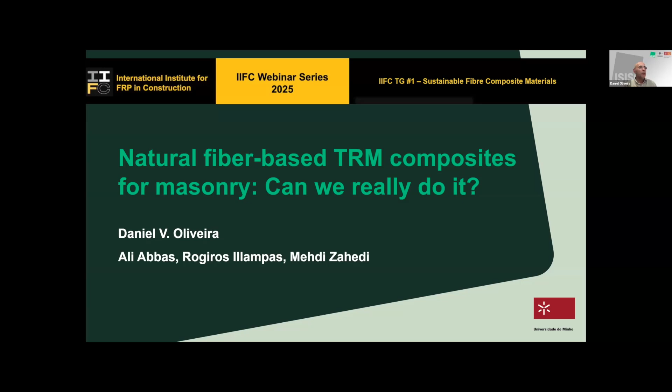So I will start with a brief introduction, presenting the scope, the problems, and the way we think we can work to come up with solutions. Then the second part will be presented by Dr. Ali Abbas, the person who implemented our ideas and performed the validation of the solution itself. He will provide all the details regarding the development of the solution.

So I will start briefly, just to give you an overview of our way of seeing the problem and coming up with it. I think this is very clear and quite agreed that our built heritage suffers from different problems, and these structures are always at risk. When I say structures, I mainly mean buildings. Although in my pictures I have other types of structures, we are typically talking about residential buildings, but this can easily be extended to other types of structures.

This should be very clear: there are two main sources. The long-term degradation that is sometimes difficult to understand or see because it takes years, dozens of years, to develop. But we also have to take into account that climate change will somehow speed up this process. This is something we cannot neglect.

On the other side, we have the extreme events. This can capture our attention very well, especially earthquakes, especially if you are located in the south part of Europe like we are, where earthquakes and masonry constructions are both very common. So one or the other will cause problems to our structures.

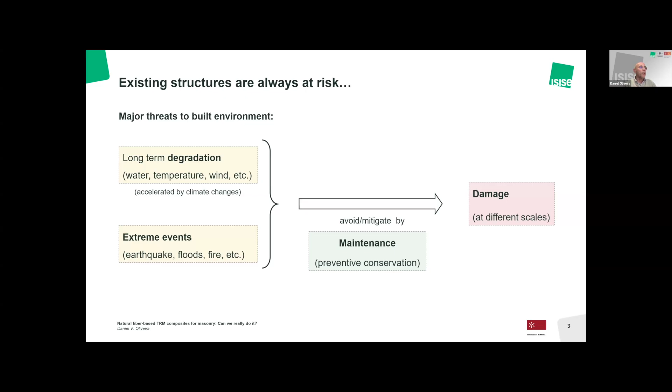They will cause damage, and we have to mitigate this damage. We cannot forget - I'll just open a parenthesis to talk about preventive conservation. This is really important; we can minimize a lot of problems that appear downstream if we act to prevent problems from appearing. Anyway, the focus here will be extreme events.

In particular, the extreme events we are talking about are earthquakes. As I was saying, in Portugal, Spain, but I would say all the Mediterranean basin, we have problems regarding earthquakes. And if you put together earthquakes and existing traditional masonry structures, you may have huge problems.

We have two very clear types of collapse. We have the out-of-plane failures, which are triggered by very low levels of horizontal acceleration. In addition, you have the in-plane failures, which affect the structure in a more global way.

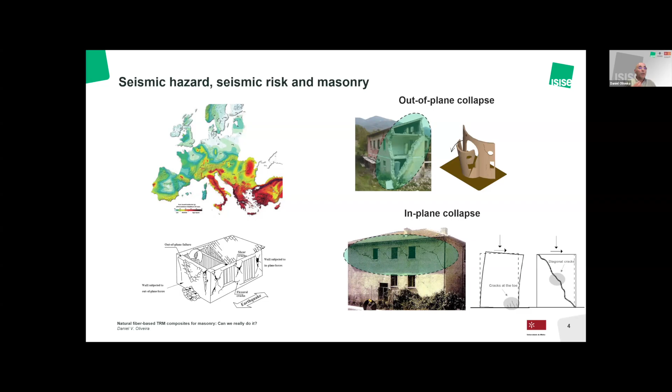Both are important, and most codes and most of us pay attention to the in-plane failure modes, and sometimes we tend to neglect or forget the out-of-plane ones, which are critical because they appear at low levels of acceleration, and once they appear, you can no longer count on the structure for the in-plane modes.

So we have to act. I will briefly show the traditional intervention techniques that work quite well from a technical point of view: tying pieces together, connecting adjacent elements - walls to walls, walls to floors, all these things. And when the structural element itself has problems, you can also strengthen the element alone by grout injection.

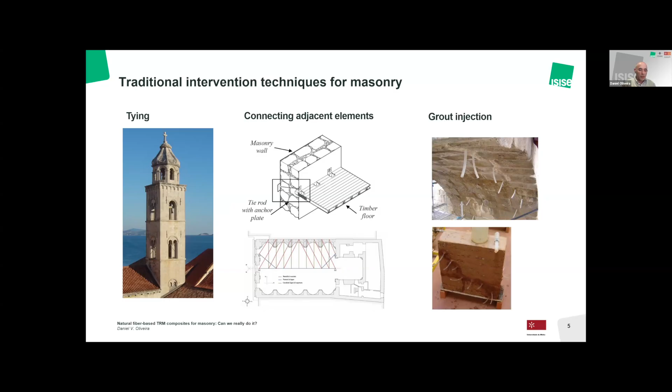These are traditional techniques, but we also have quite innovative techniques approaching the topic of this seminar. We have been using more in the past FRP-based solutions for masonry, and in recent years we have changed from an organic matrix to an inorganic one, typically using lime-based mortars.

This gives us the so-called FRCM or TRM solution, where you use a synthetic mesh embedded in a lime-based matrix, or more recently the so-called CRM, composite reinforced mortar, where instead of a dry mesh, you have a mesh impregnated with resin, which is then placed inside a lime-based mortar. These techniques are quite popular nowadays for seismic structural retrofitting, and they are quite different from each other.

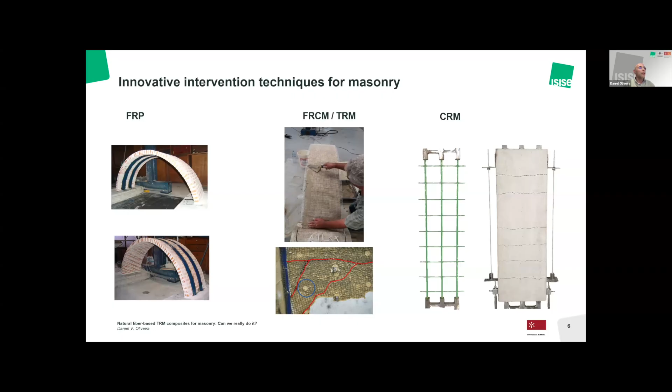I will not discuss here why we use one or the other. It's clear that there's a very important trend moving from organic matrices, resin-based ones, to lime-based mortar ones, mainly due to the compatibility of the solution regarding the substrate. Anyway, this is well known, I will not discuss this.

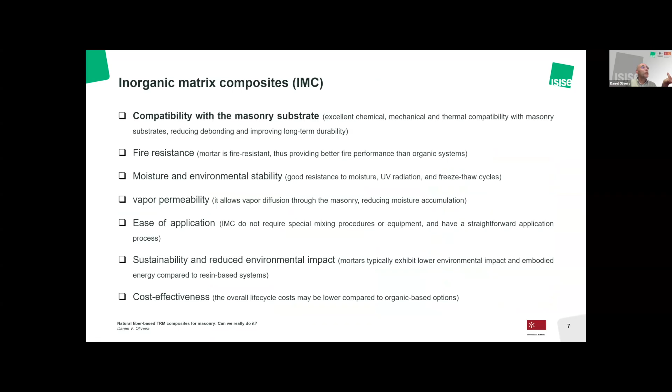But the point here is, how can we use inorganic matrix composites in a more sustainable way? One possibility is to play with the mortar. The other one will be to think about different meshes. And this work is this discussion.

Natural fibers are a good candidate. They present a lot of advantage regarding the synthetic products in terms of cost, in terms of energy of production, in terms of renewability or not. So also regarding mechanical compatibility and mechanical performance. Some of the synthetic fibers, I would say, in some cases are too good for masonry, because masonry is a weak substrate, and we cannot exploit the full potential of the synthetic fibers.

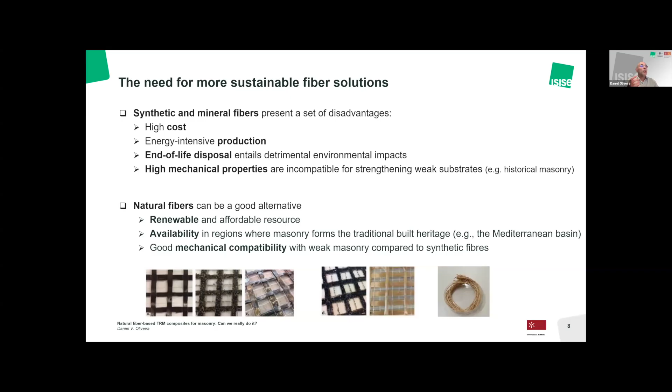So in this sense, it would be logical to use a type of fiber that is less performant from the structural point of view, but still suitable, and that would make sense to be used to produce a clear seismic improvement, typically in terms of displacement, but also in terms of mechanical capacity. And this was the idea that we started discussing: does it make sense to do this substitution, to think in this way?

Well, it's not clear. There are still doubts nowadays, although this started probably more than one decade ago, on the best way to proceed. And I think this type of group is very useful for us to discuss this, to compare approaches, and to come up with ideas and work groups to move forward in using this type of material.

As you know, this is a natural material, and as all natural materials, you have some uncertainties regarding the mechanical performance, and this is an issue because we have codes that somehow guide us and tell us the minimum capacities of the material. So in this sense, natural fibers can be an added challenge, still doable. So we can in fact work with this.

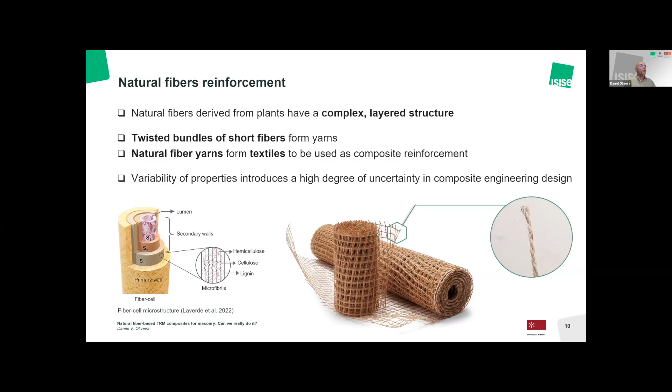I will not go into the production systems, but basically, if you look at the fibers - and I'm being focused on plant-based ones, mainly not animal-based, but talking for instance about hemp or flax or sisal - we have short fibers, and if you put these short fibers together and twist them, you go for long yarns, and then if you play with the yarns, you can create the meshes that you see in the pictures. It looks fantastic, but these fibers or yarns present some issues.

First of all, they depend a lot on several parameters. It depends on the type of plant, on the harvest process, on the country you are raising these plants, on the architecture, the way you produce the fiber. So it depends on several things, including whether you do some previous treatment to the fibers or not. I will not discuss this here, but we have to be aware that this is quite important.

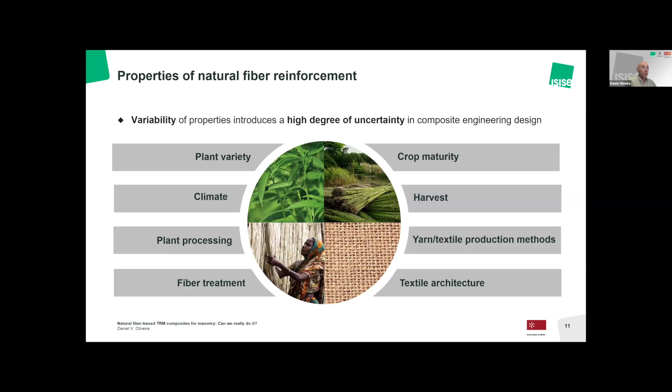So you may have even two fibers or two yarns coming from the same species, and you may have important differences in terms of mechanical performance.

This is just a brief comparison: once you start talking about natural fibers, you have to compare them with the synthetic ones. You have a comparison here with PBO, carbon, steel, basalt, and glass. On the horizontal axis, you have the relation of the elastic modulus between the fibers and the mortar, so the inorganic matrix, and on the vertical axis you have the elastic modulus of the fibers.

And you see that natural fibers are located on this bottom left side. It's clear that their mechanical performance compared to carbon, for instance, or steel, but even glass, is definitely on the bottom part. But as I said before, for some structures that possess low mechanical properties, natural fibers could be a good, affordable and suitable option to substitute the synthetic fibers.

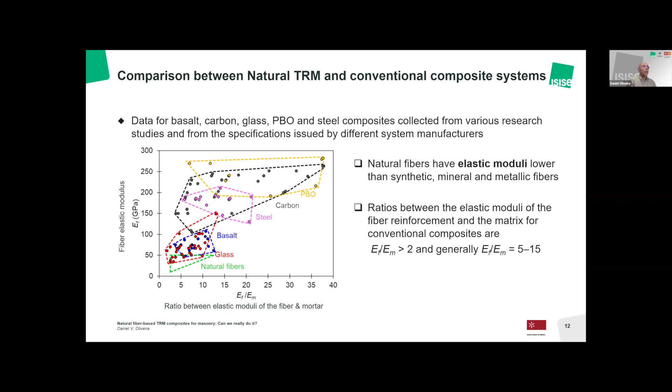Okay, but they have some problems. It's not enough to bring the fibers, put them inside the mortar, and that's it. No, they present some problems. And one of the problems we have to be aware of is this initial deformability. These primitive fibers are very flexible, so you see this bedding down effect.

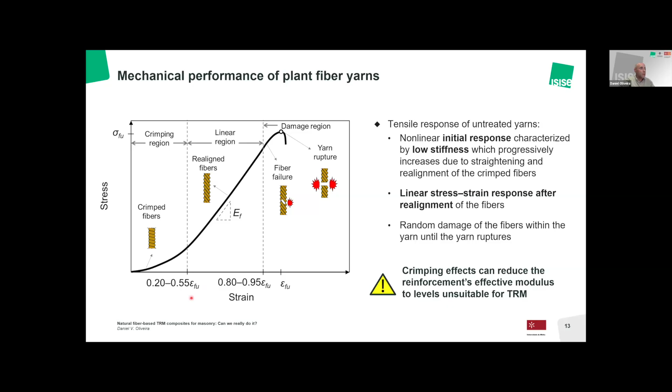This is a typical tensile test. You will see a very long piece of deformation before the stiffness increases once you straighten the fibers. This is very nice - we like to be here on this part. But before reaching this part, you have to accommodate this deformation, and this may be unsuitable inside the mortar matrix. This is a serious problem that we have to handle.

Another problem is the affinity with water. So you are putting these fibers inside a mortar, and you may have this exchange of water, and this may be causing problems to your fibers. This is also important in the long term.

And finally, natural fibers are sensitive to the alkaline attack from the mortar. So you need somehow to protect them from this attack, which will bring definitely problems in the long term.

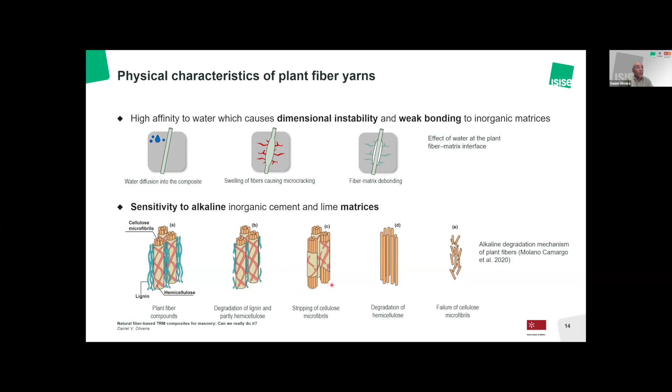So what to do? Well, if you can improve the initial elastic modulus that we saw in the graph, you can have a quite acceptable and straight segment. If you can protect the fibers from water uptake, if you can increase the resistance of the fibers to alkaline environments, and if you can comply with these three requirements, you are also extending the durability of the fibers inside the mortar matrix. If you can do this in a sustainable way, then you have a fantastic solution. This is the main challenge we had.

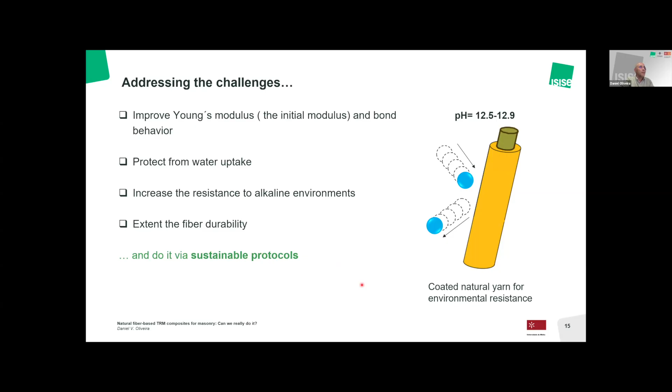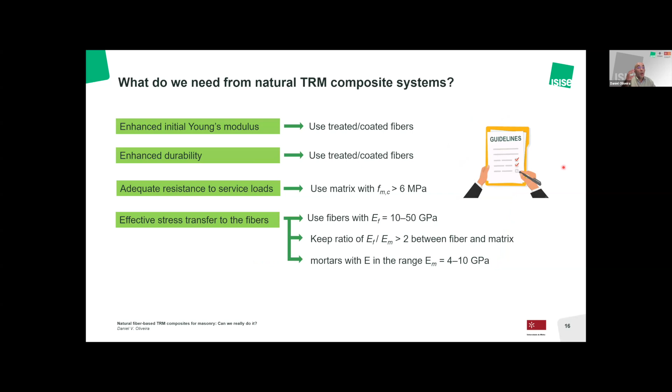So how to improve the elastic modulus, how to protect the fibers from water uptake, and how to increase their resistance to alkaline attacks - this is basically the list of things put on our table. How to face this challenge in order to produce a sustainable TRM system based on natural fibers. This was the goal.

So we started with this. I will give the word now to Ali, because Ali was in fact the person that went to the lab and developed this solution.

So we started, of course, with the untreated fibers. We developed a suitable, eco-friendly procedure to coat the fibers, and then we ran a series of tests to understand first the behavior of the fibers alone, then the fibers with the mortar, and then the mortar and a representative substrate.

So this is the long way, and you will see now how we faced each of these challenges in order to come up with a solution that works from the mechanical point of view, so it's suitable and effective, and at the same time we are able to avoid or mitigate the problems we pointed out before. We did all of this, and at the end we managed to obtain a solution based on natural fibers.

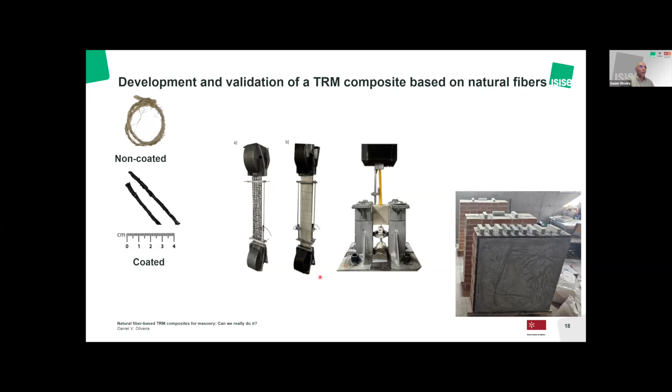Okay, so I will give now the floor to Dr. Ali Abbas, who will explain all the steps from the uncoated fibers up to the final tests at multi-level mechanical characterization. So, Ali, please go ahead.

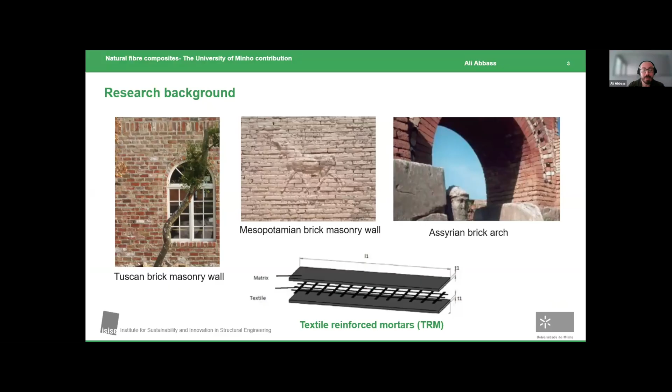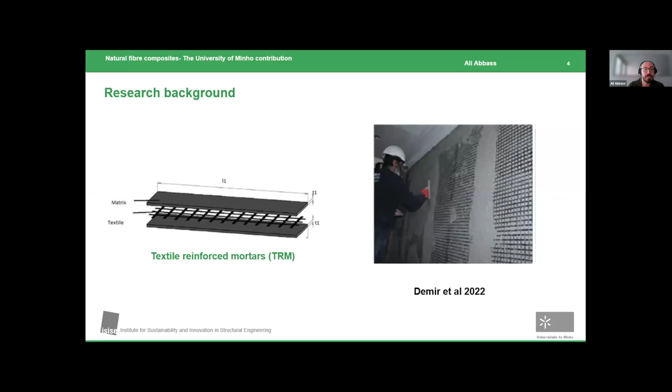I work in composite materials, strengthening solutions for existing structures. I focused in the last 7 years mainly on inorganic composite materials - technically cement, lime - focusing mainly on the so-called textile reinforced mortars. The system, as Professor Oliveira highlighted, is a sandwich of inorganic matrix, within which you have a 2D textile reinforcement, which can be synthetic, carbon, basalt, mineral, etc. However, nowadays everybody wants to go green, especially with the increasing environmental constraints and new legislation, sustainability from the EU about encouraging the use of bio-based materials by 2030.

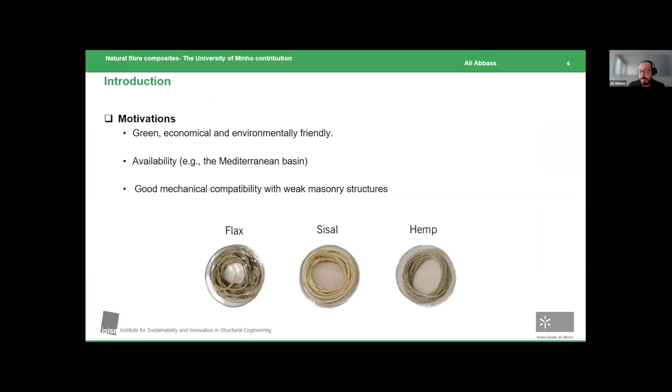The use of natural fibers is very trendy nowadays. However, I'm going to skip this part because Professor Oliveira gave very nice insight on this - it's very nice, very green, etc. Well, this package of advantages comes with a lot of disadvantages, kind of drawbacks. So mainly the mineralization when in contact with water - we're talking about hydraulic lime.

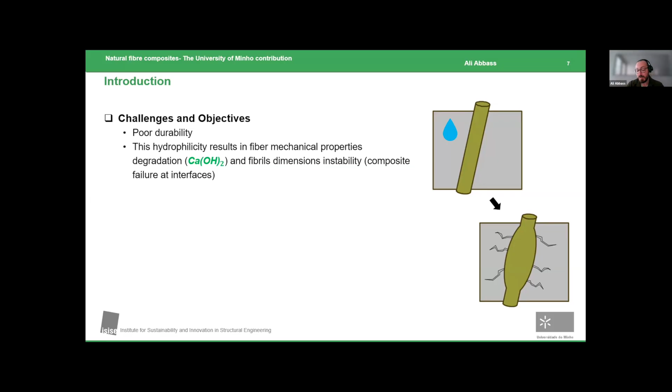It's rich with pore water, super alkaline, rich with calcium hydroxide. And these fibers are composed of polysaccharides with a super dense network of hydroxyl groups, which yields these fibers superhydrophilicity. So the moment they are in contact with water, they tend to swell just to absorb this water. And in composite materials, this can lead to microcracking in the vicinity around the fibers, resulting in total failure of the composites.

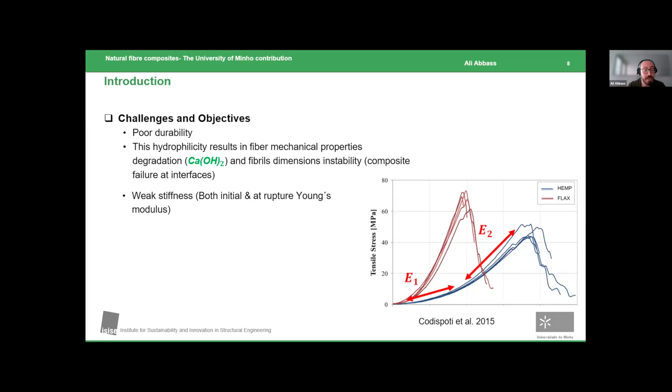So the weak stiffness and this nonlinearity, Professor Oliveira addressed it very well. It's a nightmare for designers. Usually people working with natural fibers design according to the second branch of the stiffness up to failure, and they forget totally about the first part, which is technically in function when the composite material starts to perform composite behavior. Most importantly is the weak bond behavior.

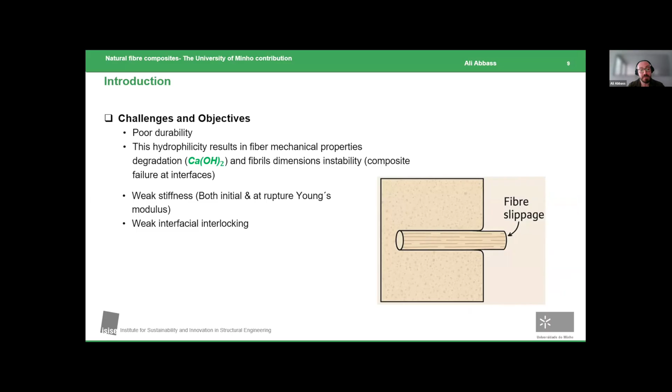These fibers have a very pristine surface. They have almost no chemical adhesion with inorganic matrices. So this is a very important issue to have a reproducible design of composite material reinforcing systems. To tackle these challenges, I'm going to take you on a trip through a multidisciplinary topic today.

There are many ways to tackle these challenges. One of them that we chose during my PhD studies is to chemically modify the natural fibers. So I navigated all protocols, all technologies present in nanotechnology, textile, paper industry, etc., to improve this surface morphology and the surface chemistry of the natural fibers. At the end, after trial and error with hundreds of samples and tens of protocols, we settled on two main protocols.

The first one is called in situ. What an in situ surface modification protocol is: technically, you put in one pot the reagents of the coating itself, and you put the substrate - I'm referring to the natural fiber lignocellulosic substrate in this case - and you let it grow over time. Then you take it from this kind of container, treat it, and you have your fibers coated and ready.

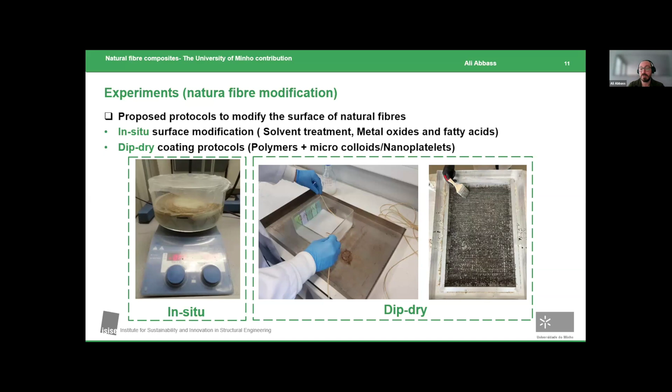The first system is metal oxide modification of the lignocellulosic architecture of the natural fibers. This methodology is vastly used in textile engineering, usually to modify the properties of textile before going through industrialization. It sounds simple, but the phases are quite critical, and you have to adhere to a very systematic coating process to get the overall result satisfying.

First, you would have a container with zinc acetate dihydrate in an alkaline medium with a buffer to control the alkalinity. Then you would put the lignocellulosic material in at room temperature and let it sit overnight. Then you will have this beautiful microstructure with different phases - microrods, microlamellas, microspikes grown onto this lignocellulosic surface.

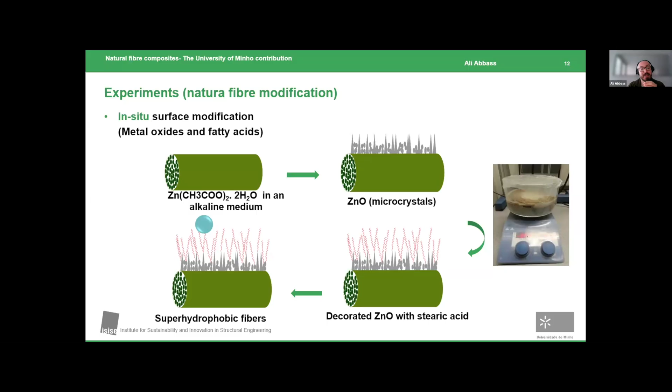So up to now, we didn't achieve any wettability advantage - only the morphological improvement. In order to improve the hydrophobicity of the natural fiber, we would decorate this microstructure with a fatty acid called stearic acid. Stearic acid is a superhydrophobic molecule - I'm sorry, I'm going to bore you with a little chemistry today, but it's essential to the core of the work. It can repel water, and it's technically a wax. So you decorate it through a zinc stearate molecule, and you would end up with superhydrophobic fibers.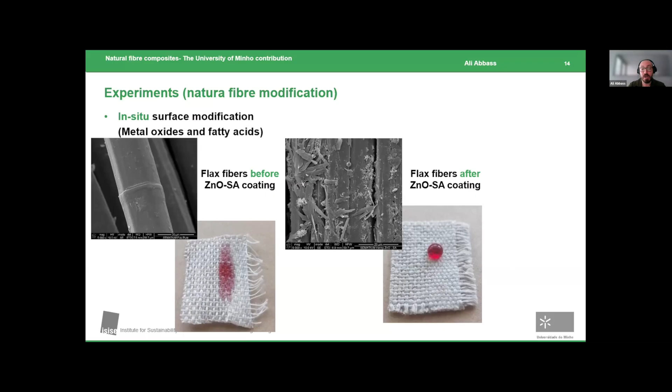So we've done the tensile characterization of this. Of course, we've done a lot of chemical, morphological, and elemental analysis of this, but I'm not going to show you all because then I'm not going to have time for other stuff.

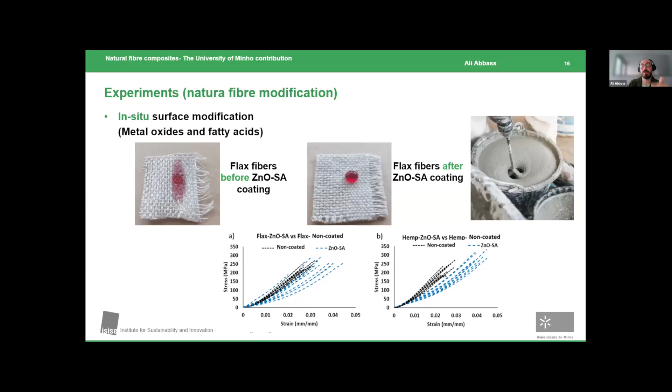So here you would see the tensile behavior. We observed some sort of a decrease in the Young's modulus and increase in the strain. This is called plasticizing effect due to the alkalinity of the solution used. So after all, we kind of observed that this might not be suitable for a 2D reinforcing kind of textile. It might be more suitable for a short fiber composites in inorganic matrices.

So moving to the second protocol, which is the dip dry. The dip dry technically comprises a polymeric formulation reinforced with a substance of a choice. In this case, we chose chitosan as a bio-based polymer, so this protocol is 100% bio-based. Chitosan, for those who don't know, is a bio-based polymer derived from crustaceans, shrimp-like kind of biomarine mass, and it's very sticky.

It can stick on lignocellulosic surfaces in acidic medium. So we would take this chitosan polymeric formulation, heat it up to the melting point of the beeswax particles. Beeswax particles, they perform as a fatty acid here - they are the superhydrophobic molecule that we want to deposit onto the fibers. So we emulsify at the temperature of the melting temperature of the beeswax.

Then we obtain this kind of emulsion, and we carry on, as you can see here, the coating. So we dip, then we solvent cast through heat treatment. Then we have this beautiful aliphatic superhydrophobic tail of the beeswax kind of protruding outward of the surface and repelling the water, resulting in a superhydrophobic textile reinforcement.

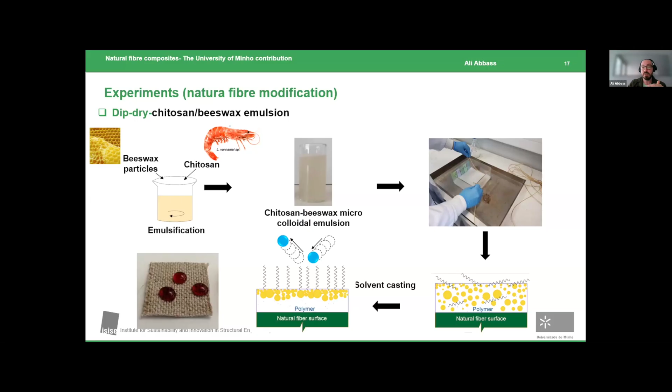Just to mention, forgot to mention, the tensile behavior, with all the other characterization tools we've carried on, it was good, but it didn't kind of eliminate this low initial stiffness fully. So this is just to keep in mind why we moved to this protocol.

So this final protocol comprises the use of a water-based polyurethane, very low resin content. We're talking about 30% resin content, and the rest is just water byproduct. So this dip dry coating would comprise a polymeric formulation of polyurethane. We would add glycerol as a plasticizer to control the flexibility of the coating itself.

Then we would add a dispersing agent, which is polyethylene glycol, to homogenize the distribution of graphene within the polymeric matrix. So we're talking about a composite material, a nano-composite material. It has the same concept: nano-reinforcement and a matrix. Then we would prepare this through homogenization in ultrasound.

We apply high shear of 15,000 rounds per minute, and then we apply it to the fibers and heat treat it, and we obtain, as you can see, these black nanocomposite coated natural fibers.

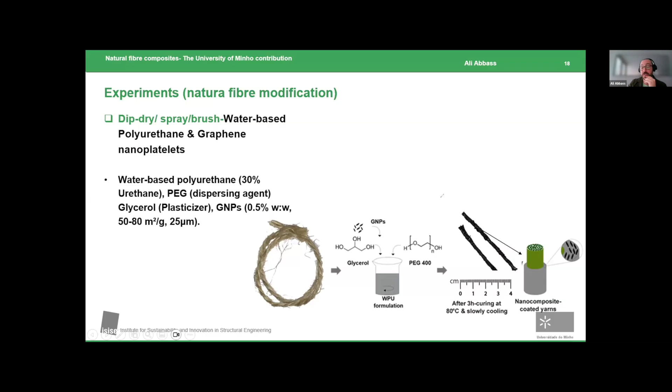There is a tiny step here we might add to improve the chemical adhesion between the nano-reinforcement and the polymer itself. This is important to increase the mechanical property of the coating itself and improve its water resistance, as you will see later on.

So we would take these graphene nanoparticles, coat them with a very versatile polymer that is bio-based, called polydopamine. It's derived from the foot protein of mussels. Mussels adhere in very wet environments to rocks, seas, and oceans, so you would see very strong adhesion even in wet environment.

So biomimically, we took this polymer, coated the graphene with it, and then we have a chemically adhered graphene to polyurethane, yet maintaining the environmentally friendly trait in it.

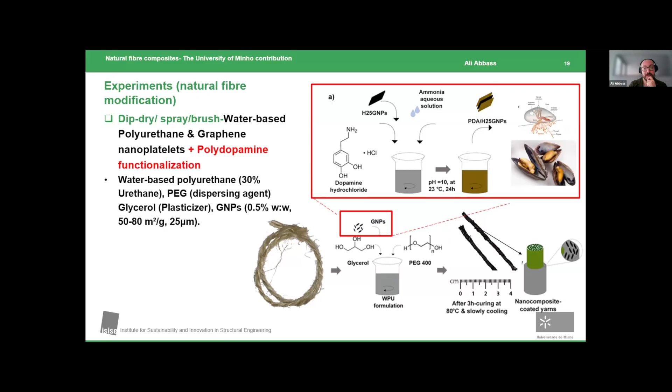So this work was published in Composites Part A. For those who are interested, you could check it out for further information.

So we'll start with the water absorption test. You could see the non-coated fibers reached saturation after 6 hours at almost 150% of the weight gain due to water absorption. While for the coated fibers, we reached saturation at 6 hours of 10%, and that was maintained up to 24 hours. So this is quite water resistant.

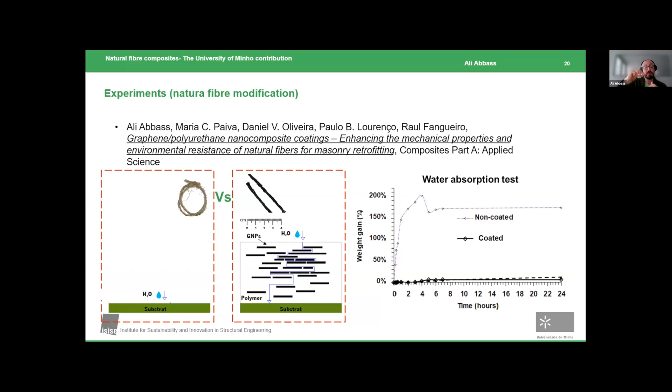It's not super hydrophobic, and it's not hydrophobic either—it's water resistant. This is due to the so-called barrier effect: the graphene nanoplatelets align in a sheet-like manner, which slows down the propagation of the water through the polymer to the substrate of the natural fiber.

Moving to the most mechanically important part of the modification: the stiffness. We solved the issue of unified stiffness throughout the tensile loading, so this solution can now be used in a reproducible design. You would have a unified stiffness throughout the strain and tensile load, with a representative value—wherever you take it, the tensile behavior of the yarn is identical.

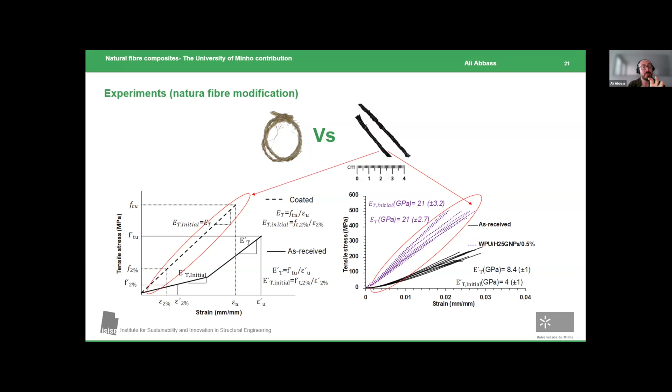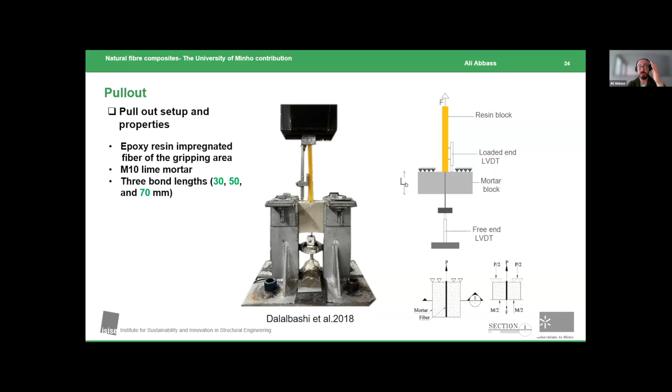So here we have fully bond behavior dominating the deformation. We used two LVDTs: one at the loaded end where the friction onsets, and one at the free end to establish when the friction status throughout the bond length was achieved.

A typical pull-out load-slip curve shows three distinctive phases. First, a linear elastic phase where the adhesion is intact. Then, at the loaded end, the bonding starts to debond—here you have a nonlinear phase where the bonded regions become unbonded, so you have friction and adhesion at the same time. Then you have the fully debonded region where friction dictates the entire interface.

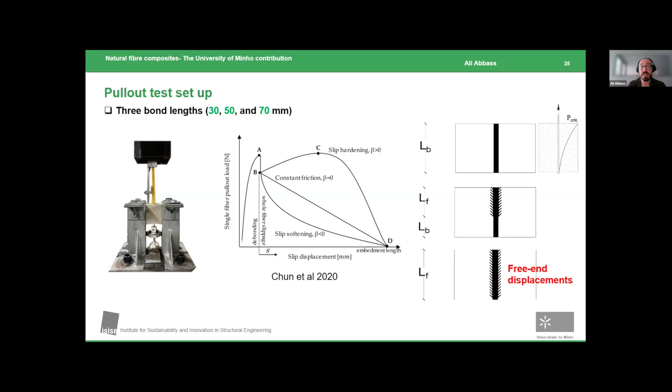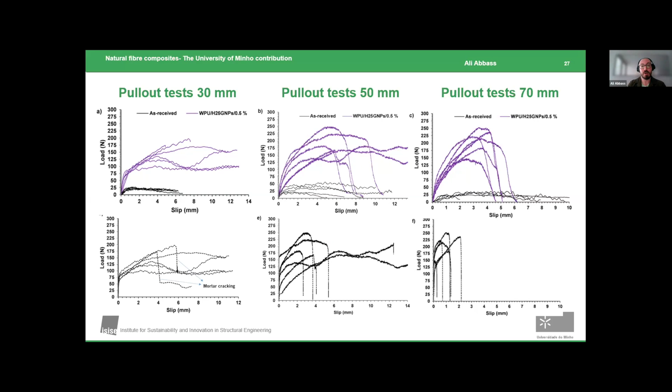You can understand this better when you see the displacement at the free end. The free end displacement starts to happen when we have full friction achieved, and you will see slip hardening after friction going on. This means friction is stronger than the adhesion itself, and we have mechanical interlocking dictating the interface rather than adhesion.

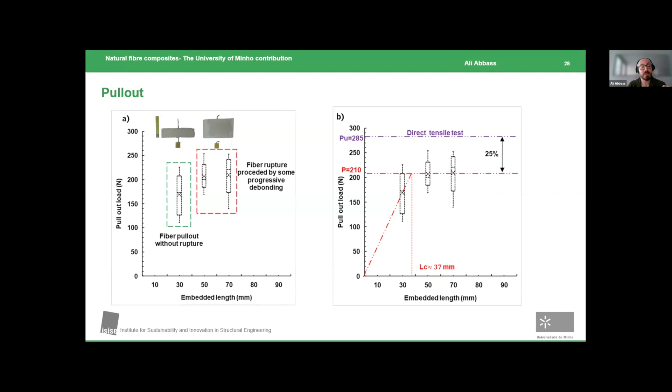Based on this, we evaluated the effective bond length based on the best-fit graphical estimation—it was around 37 millimeters. As you can see on graph B, there's 25% less tensile capacity recorded in the pull-out test compared to the direct tensile test, due to the peeling, i.e. reduction of the fiber itself. This polymeric peeling phenomenon happens mainly in polymer and plastic-based reinforcements in inorganic matrices.

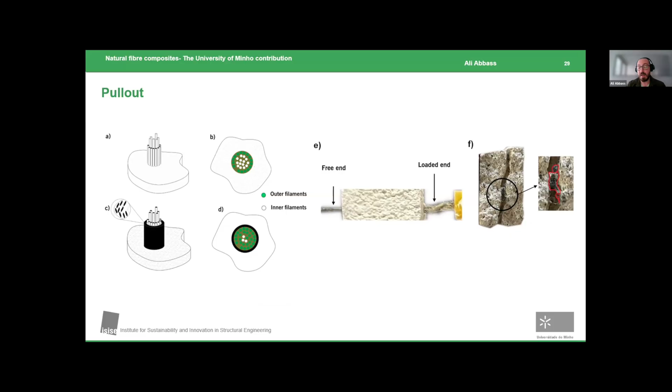This was evident by the residual nanocomposite you can see here in this figure, found in the vicinity of the fiber.

Now let's move to the composite materials. We designed the composite materials based on the isostrain model to evaluate using the rule of mixture, and to evaluate the critical fiber volume fraction. We used two fiber volume fractions: the first is double the critical fraction, and the second is 5.5, resulting in 7 millimeter and 5 millimeter mesh sizes.

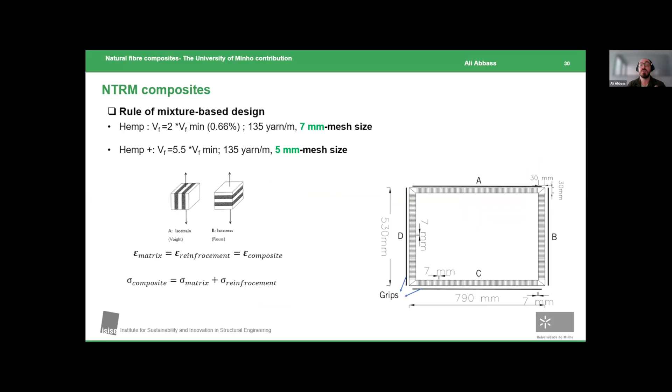Based on this, we designed a mold to cast the textile without weaving. Here you would see also the yarns are stretched by a constant load equal to more or less 2 or 3% of the tensile load capacity of the yarn. Then you would see the phases of coating, casting, coating, drying.

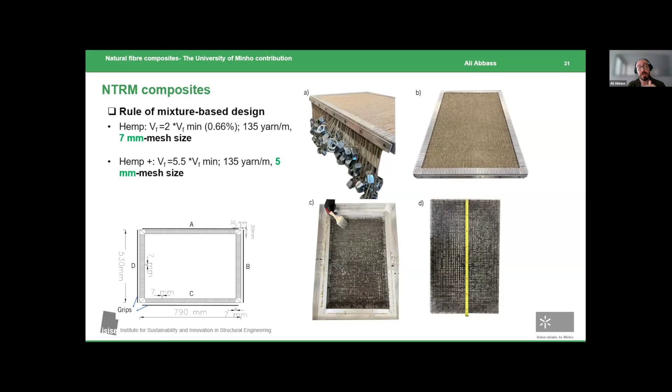Then we cut it into strips to carry on a direct tensile test on textile and on coupons, as you can see here. I'm not going to take you through much detail because I guess this is very standardized.

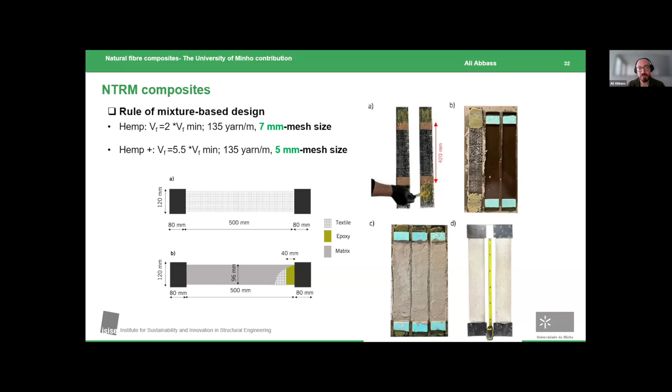Just to let you know, we didn't use a clevis system, so we technically grip the textile, we don't grip the mortar itself. This is a tradition practiced in Minho, and we believe this is the most suitable and representative case for the tensile test of composite materials. For a composite material to behave properly, it should show three distinctive phases.

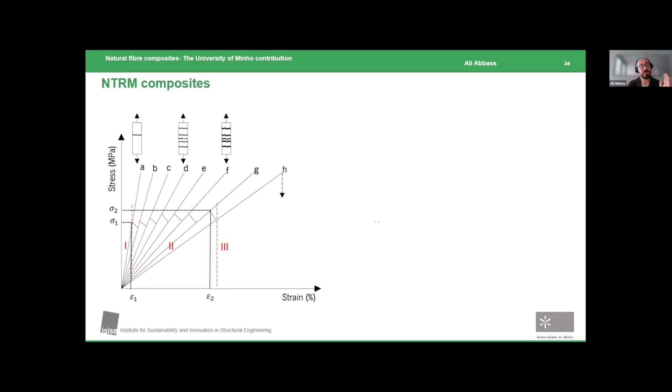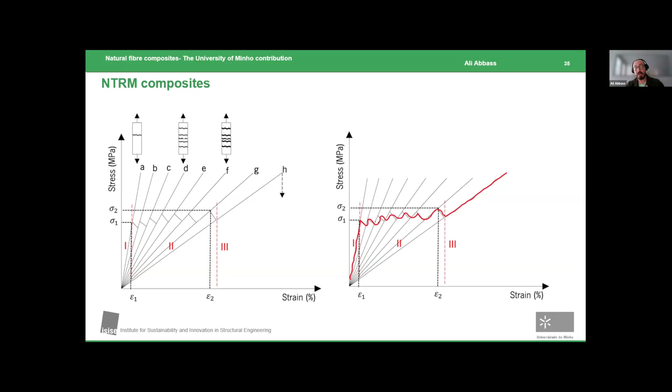The first phase, you would see it here, is dictated by the mechanical properties of the matrix itself. So we apply tensile load, then we reach the tensile strength of the mortar. Then we have failure, and then the fibers in a good, well-designed composite material should accommodate to the next intact phase of the matrix, and so on, showing at the end this kind of three distinctive phases, as you can see here.

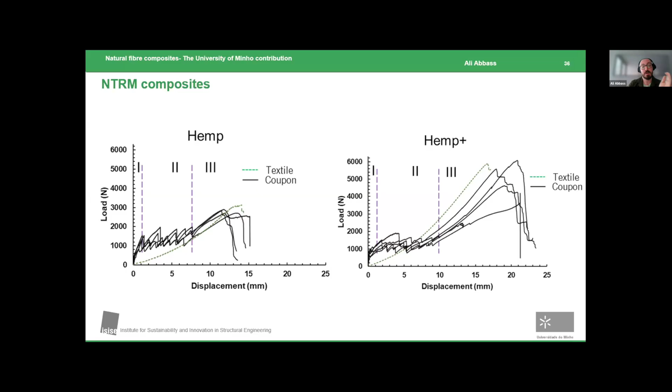Here you will see the results of the tensile test on coupons, and you could see very clearly these three distinctive phases appearing in both volume fractions. In all three, the transition is very clear from one phase to another, highlighting the good accommodation of tensile stresses from fibers to mortar and so on.

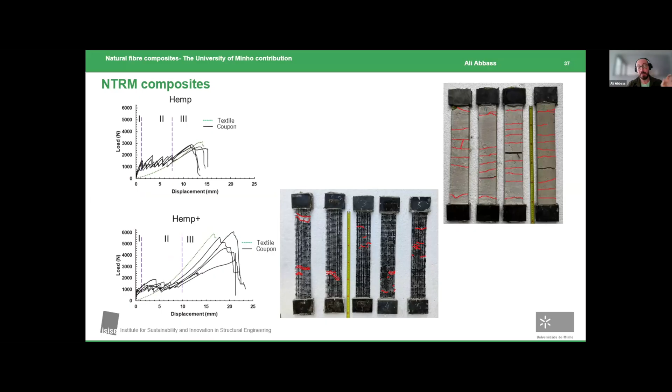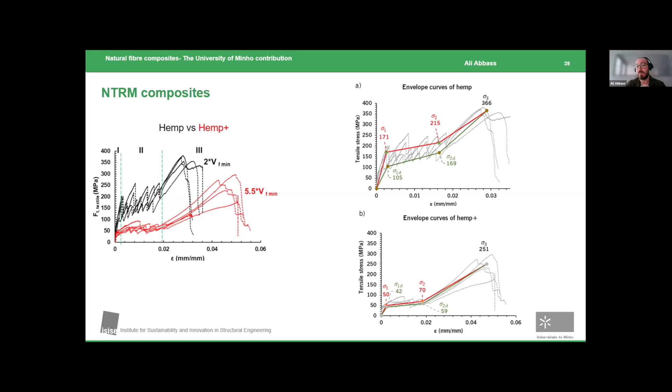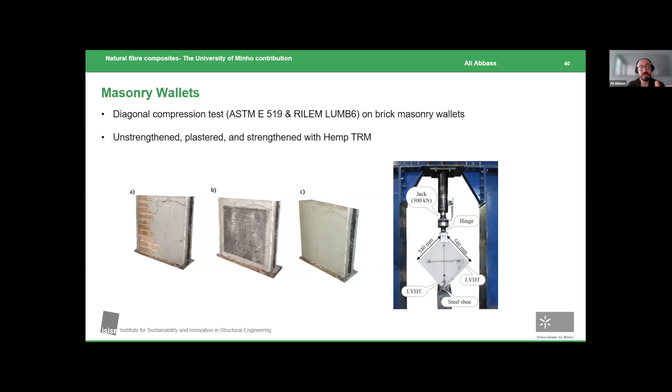After cracking immediately. So finally, to finalize, we carried on diagonal compression tests on wallets strengthened with the system, developed with the nanocomposite coated textile, and we tested a reference wallet non-reinforced with anything, then a wallet reinforced with our system, and one with only the matrix, just to understand the effect of the reinforcement and its efficiency to accommodate the diagonal kind of cracks.

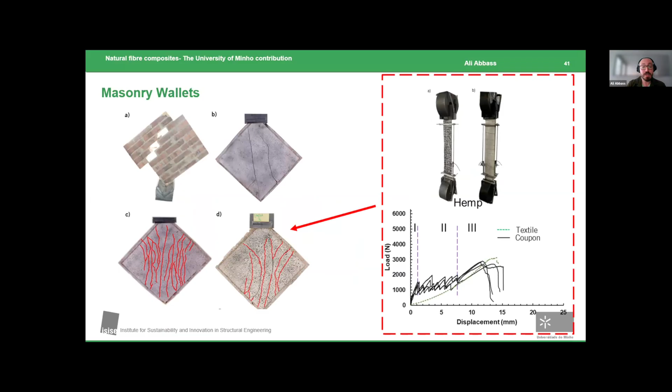So here you would see the results. We have vividly the ductility, the pseudo-ductility obtained with the inclusion of the fibers, and this is very important when we're talking about seismic. Of course, this is not seismic because this was done monotonically, but it gives an idea that this system can function up to an extent in a seismic region.

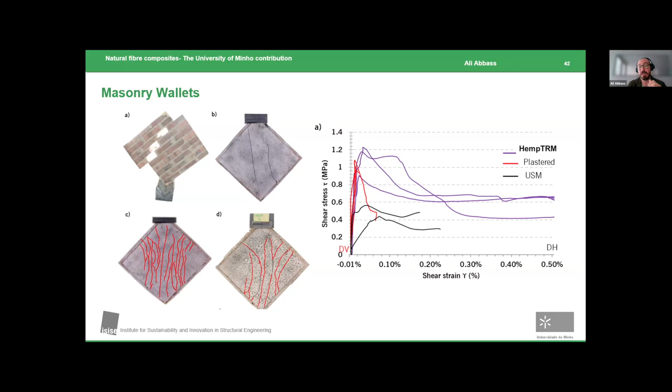The plastered ones, although they achieved nice shear stresses, had zero ductility technically. In the non-reinforced wallets, you would see a kind of super pseudo-ductility, and it's not related to the structure itself, it's just the strut effect, so it's not real. So the purpose of the fiber inclusion in the composite system was fully achieved.

Here you would see some fiber ruptured upon testing, although we have observed some kind of delamination due to the surface finishing of the bricks, but this is something we could test in the future. We could kind of get over it.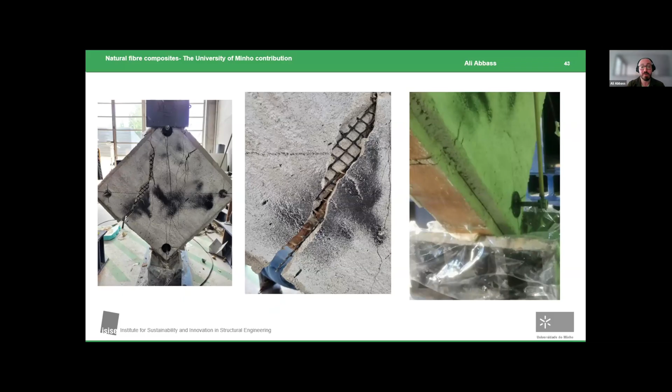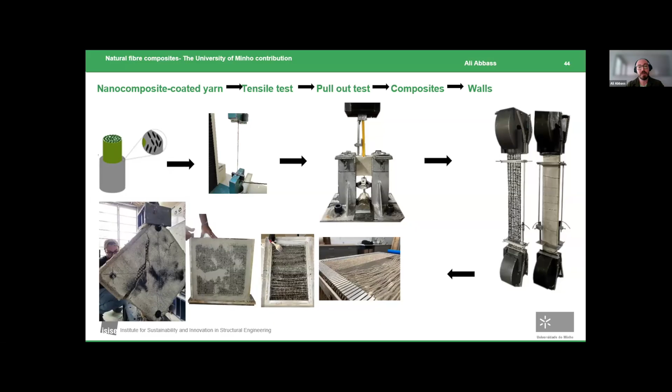So this was the trip from the nanoscale through all the chemical characterization, which I did not cover in here, then we moved to the mechanical, moving from single yarn testing, ending up with a masonry wallette strengthened with the system. These are the main conclusions.

I guess they're implicitly mentioned throughout the presentation. The system is nice, we can work natural fibers with coating, with weak structures, well, with masonry structures. With concrete, it's a different scenario, it's not my area, and probably better not to approach it.

The most recent work we've done and concluded was in collaboration with Kerakoll for durability and long-term behavior, accelerated aging of this system. We have nice results, but I'm sorry, I cannot show it here because it's still not public yet.